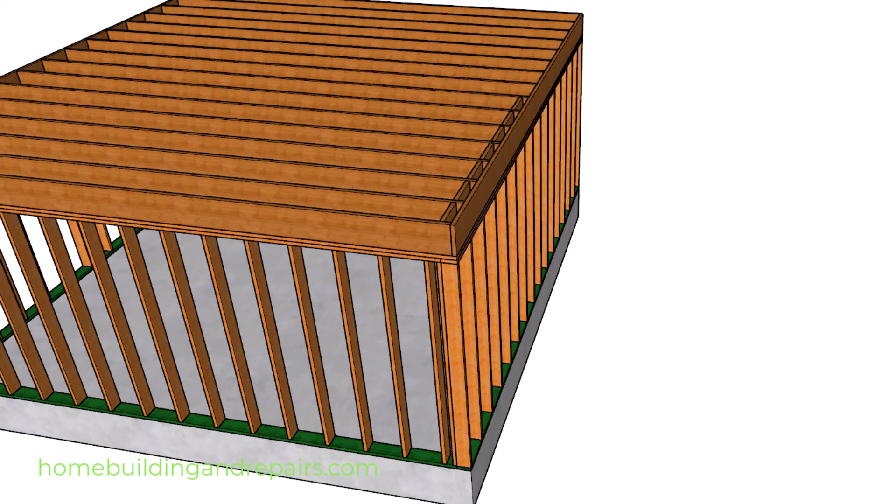In this video, I am going to be talking about firewall joist hangers. But before I do that, I just want to go over a way that you can build a firewall, and that will be with the joist sitting on top of a wall and then blocking or double blocking or triple blocking. So for example, a 1.5-inch construction standard piece of lumber is usually rated at a 1-hour burn through.

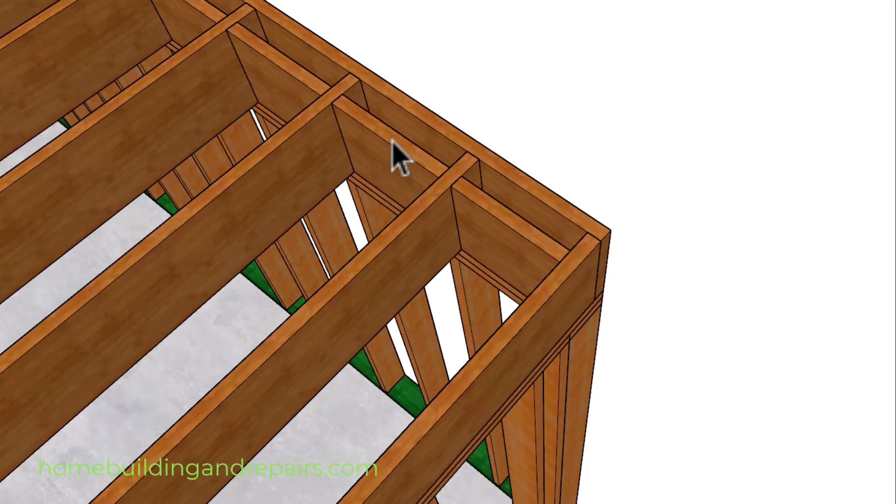So if I had one block, that would be 1 hour. 2 blocks, that would be 2 hours. So I'm just kind of throwing that out there. I am not an engineer, and I don't know what your city would approve or what they wouldn't approve.

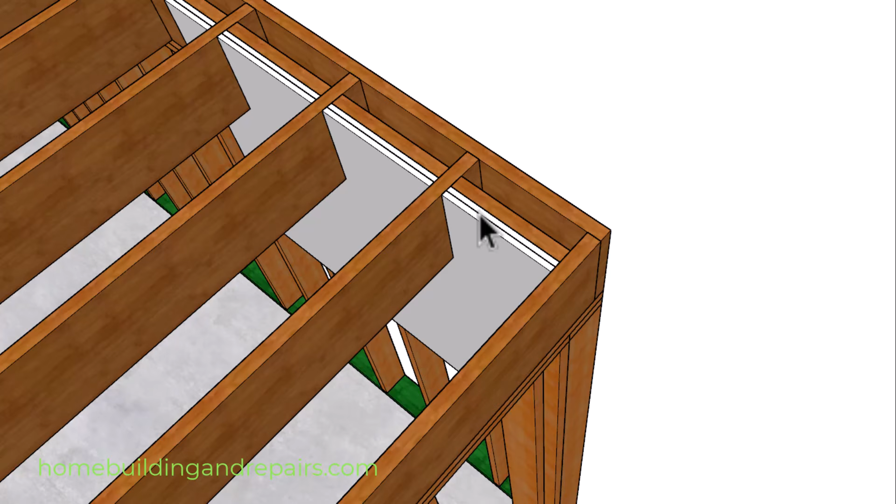And then, of course, I can notch the drywall around the joist to create a 2-hour firewall. 1 piece of drywall, 1 hour, 2 pieces of drywall, a 2-hour. So hopefully that makes sense on one method you can use to create a firewall without any joist hangers.

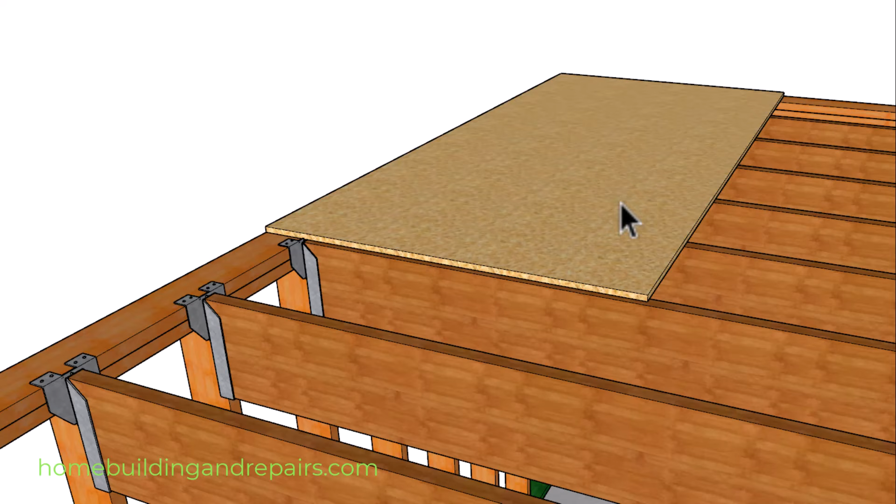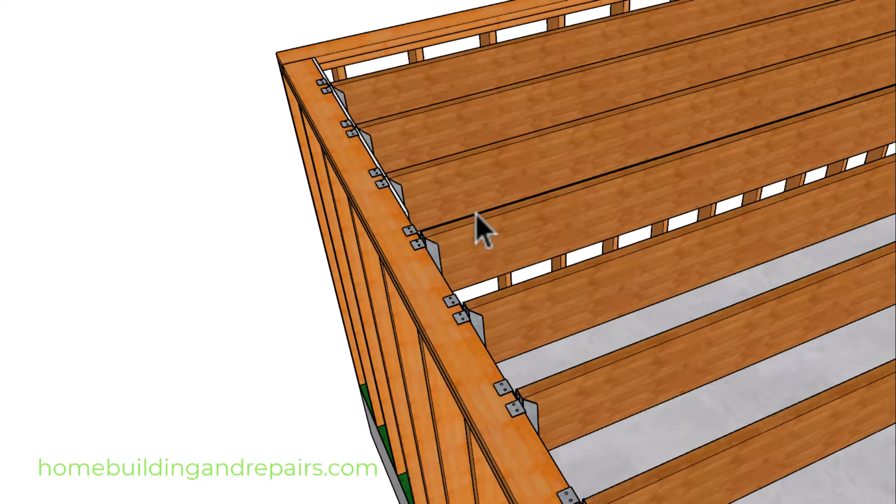Next up, let's go ahead and install some top flange fire-rated hangers or firewall hangers. And I know some of you out there, you love new gadgets, and something like this might be providing you with some type of arousal. But before you get carried away, I need to have you check the price of these hangers, because one of the prices I found put these at about $47 each, which is probably going to help the company who makes these immensely.

And like most top flange hangers, they are going to be attached at the top, and then you will fasten the joist to the hangers with some nails at the bottom. And before we continue, I need to point out that I did a lot of research before I made this video,

and I found some suggestions that said if the joist was on fire and it started to sag, let's just say, for example, the joist burnt through in the center, then the joist would fall out of the hangers and reduce or even eliminate the chances of pulling the wall down along with the joist.

But I don't buy that, because the joist would have to separate from the connection at the bottom where the nails are attaching to the hangers, and the floor sheathing would have to burn through, because you're still going to have a connection at the top of the joist where it's going to be attached to the floor sheathing, which is going to be attached to the wall.

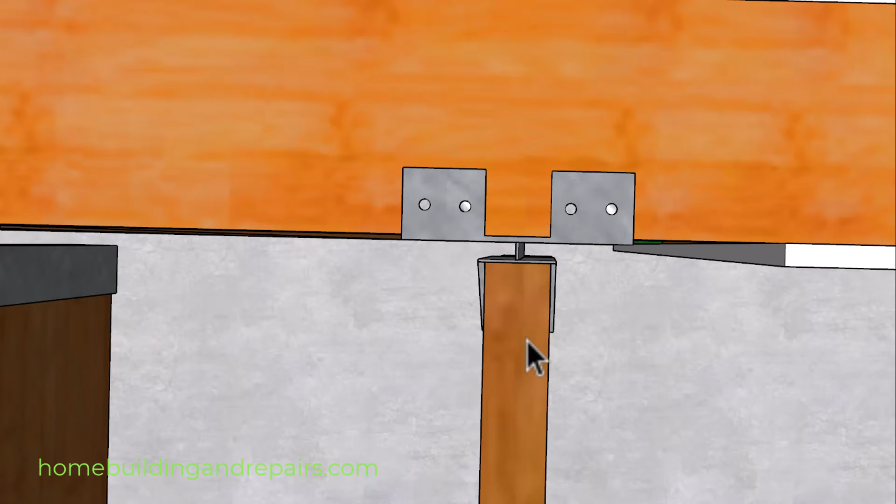And of course, these hangers are designed for the drywall to slip behind the joist, allowing the drywall to be installed after the building is constructed, which could be another problem. And I have worked on jobs before where we had to install the drywall, and it did take a while, and it did actually slow the job down a little bit. So this could be another sales point for this type of material, but I'm still not 100% sold on it.

And when I say that 100%, I can't imagine the price of something like this for a large beam or a large open web joist, where a hanger like this might cost $100 or $200. And if that's the case, then you're really blowing the price of the building out of the ballpark. But again, I get it.

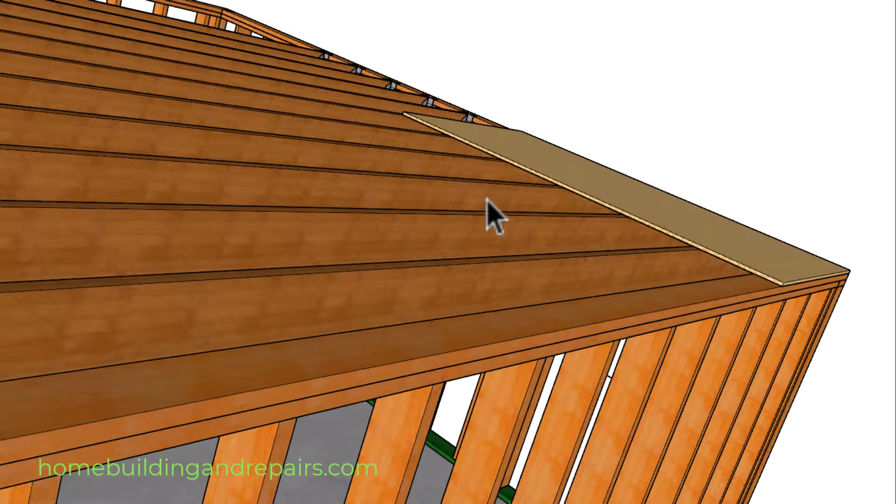Some people need all of this stuff right here, and they're sold on a reason because someone else told them to. I just don't buy it all the time. I would have a difficult time designing a building using something like this, when there are other ways that might not be as efficient, but might definitely be cheaper.